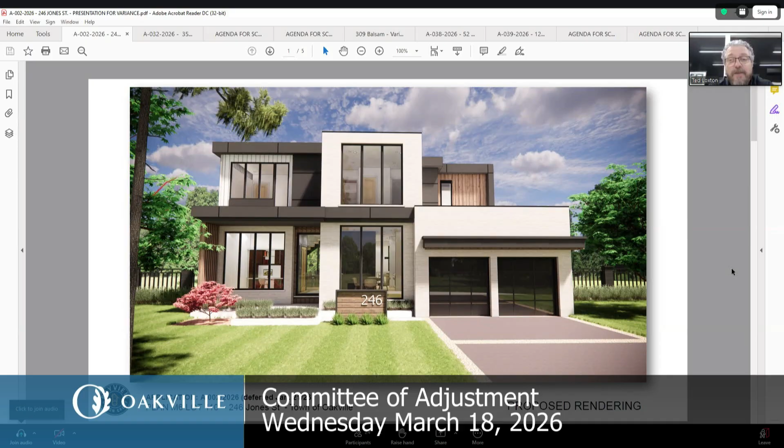However, massing wasn't the basis for staff's previous recommendation for refusal. Next slide please. Here we can see the original ask on the left and the revised on the right. The notable changes: first, banding now extends across the front face of the dwelling to separate what was basically a two-story window. Second, the one large garage door was separated into two smaller garage doors. These changes were done at the request of town staff, who are now in support of this proposal.

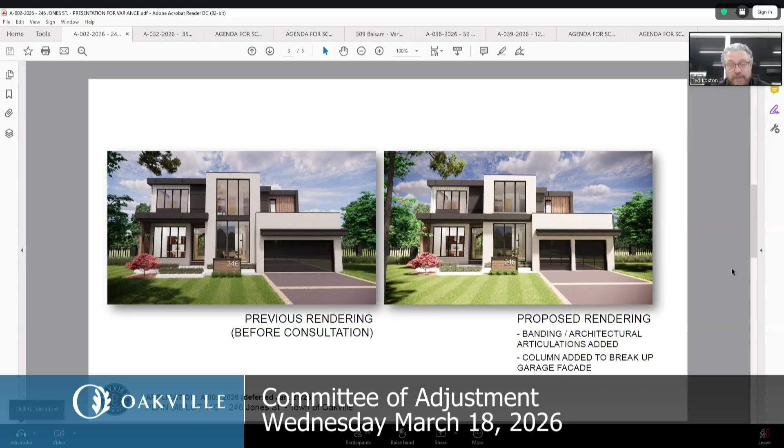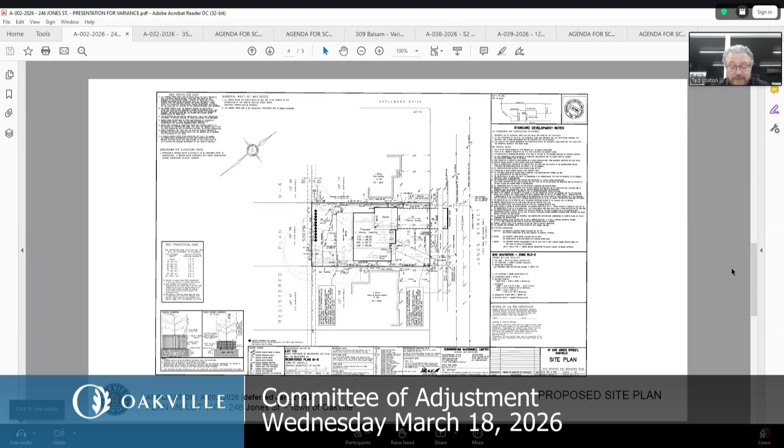Next slide please. The variance ask didn't change, as we'll see, with the exception of a typo I had. Next slide. Here are the site stats, with lot coverage at 39.8%, where 35% maximum is permitted, and the FSI to lot ratio at 43.55%, where 41% is permitted. For both, we tried keeping it as close to allowable as possible, so we do have some minor increases. Beyond that, I'd like to thank you for your time and consideration of our application, and I'm here to answer any questions.

Any questions of Mr. Loxton?

Has anyone called with interest for this application, Madam Secretary Treasurer? We've had no calls and no hands. Very well, then I'll take a motion.

Thank you, Madam Chair. Having undertaken my site visit, having reviewed the materials, including the written staff report, and having heard Mr. Loxton's presentation, I'm prepared to put forward a motion to approve the requested variances, finding that they conform to the 4 tests of the Act. The motion would be subject to the 2 standard conditions noted in the staff report: that the dwelling be constructed in general accordance with the submitted site plan dated February 4th, 2026, and elevation drawings dated February 5th, 2026, and that the approval will expire within 2 years of the date of the decision if a building permit has not been issued for the proposed construction.

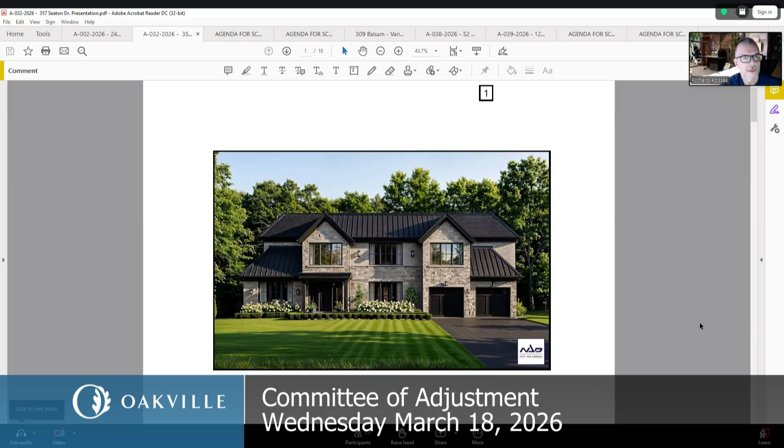Today we have two variances, there is a slide presentation as well. It's on screen, that's the infill two-story single-family home. The first variance is the garage floor area. If you go to slide 4, we can see the garage from plan view. The excess floor area for the garage is 62.28 square meters, where 45 square meters is the maximum. You can see it's a tandem garage, so the street facing is still 2 garage doors, and the excess garage space is in tandem with one of the bays.

The second variance is for lot coverage of 27.96%, where 25% is the max in our case. That includes the covered rear veranda, the covered front veranda, and the entire footprint of the home, including the garage. That concludes my presentation, if you have any questions I'm happy to answer them.

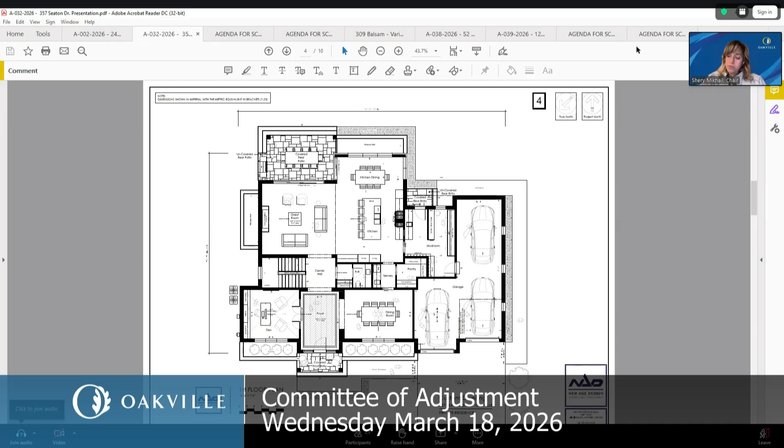Thank you, Mr. Kozak. Any questions of Mr. Kozak from the committee members at this time? I see none. Has anyone called with interest for this application, Madam Secretary Treasurer? We've had no calls and no hands. Very well, there's no interest from the public.

Who would like to move a motion? Go ahead, Ms. Price. Ms. Price, you're muted.

Taking into account my site visit, the reports from the agent and staff, and there being no letters of opposition, I believe the revised application to be minor in nature and in keeping with the general intent and purpose of the official plan and zoning bylaw, and desirable for the appropriate development of the land. The proposed development also maintains and protects the character of the existing neighborhood and does not present unacceptable adverse impacts. As mentioned by staff, the lower roof lines and step backs help break up the massing and scale of the proposed dwelling. The tandem parking configuration allows for additional indoor parking without adversely affecting the character of the neighborhood. In conclusion, I believe the 4 tests have been met, and I recommend the application be approved subject to the following conditions.

That the dwelling be constructed in general accordance with the submitted site plan dated February 2nd, 2026, and elevation drawings be submitted with the application. That the approval expires 2 years from the date of the decision if a building permit has not been issued for the proposed construction. Thank you, Ms. Price.

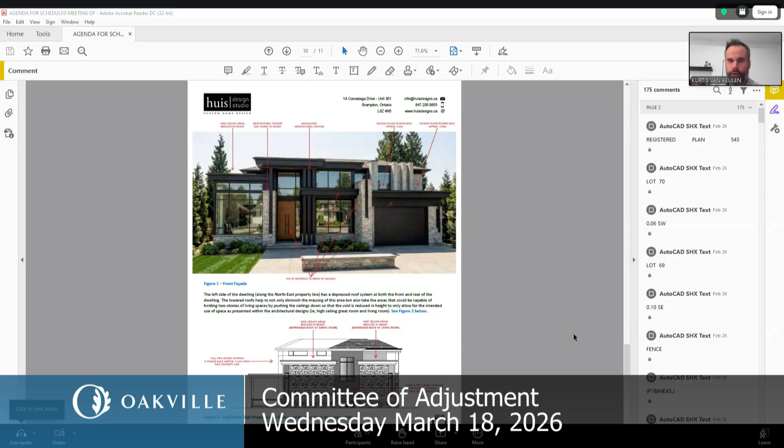Our attempt on the design was to set back the second floor of the dwelling. You'll see a large step back over top of the garage and over top of the entry feature, which has also been split up into two portions to accentuate more of a divide at the single story and break up the massing of the front entrance. Also, an attempt to reduce the massing was made for the living room off to the left-hand side of the front entrance feature. That living room ceiling has been reduced and pushed down, and the roof massing on top of the second floor has been cut in above that.

We believe these combined effects on the front facade really buffer the massing of the home to the neighboring properties. Slightly down on the same page, you can see a side elevation, which gives you an idea of the height of the roof over top of the family room. The family room at the back of the house has also been reduced to the same height.

There's another illustration on the second page that also shows the setbacks to the front elevation. So overall, the setting back of the second floor and the lowering of the 1.5 story ceilings really reduce the overall impact of the mass, thus allowing for the RFA increase.

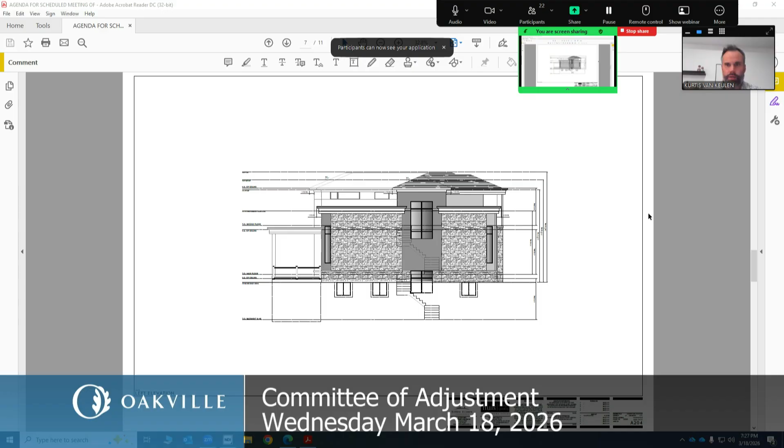Okay, Mr. Van Keulen, go ahead. Yeah, so if staff wants to bring up the proposed site plan, I can certainly answer those questions. It would be page 2 of the submitted documents. If you'd be able to zoom in just slightly, we would be able to show the garage. The proposed garage is slightly closer to 1402. However, it's within the setbacks of the zoning bylaw. So we are 1.2 meters on that side of the home from the property line, so 4 feet from the property line, whereas currently we're just slightly over 2 meters right now. So it's going from about 2.3 meters to 1.2 meters on that side, again within the legal zoning bylaw setback requirements.

There are 3 trees that look like they will need to be removed. One of them will be one of the larger ones. It's within the buildable footprint of both the zoning bylaw allowed buildable footprint as well as the buildable footprint that we're proposing. You can see that roughly on the right-hand side, just behind where the garage would be, or where the driveway would be, the larger tree there. We are making sure that the front tree in the front yard is to be retained and will remain. There's a very small tree in front of the existing home that will be removed, I think it's noted actually as a shrub when I look closer. So we are proposing a sort of circular driveway that will go around one of the large trees, so there will be a second entrance added to this property.

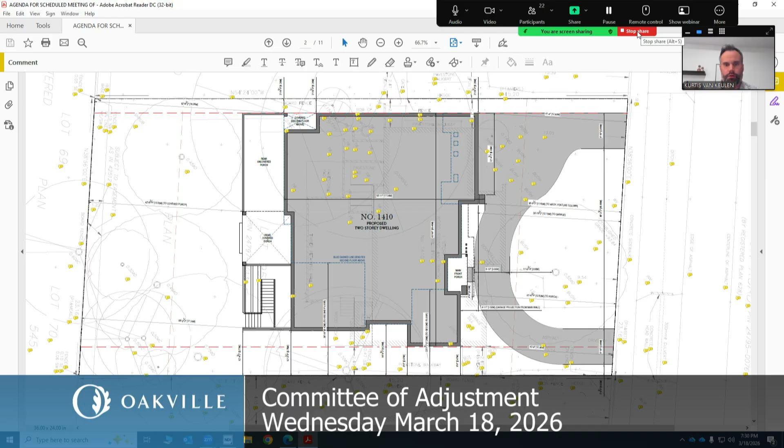So the trees and the setback, I believe that was the main question. Yeah, and the driveway is typical. I think that's probably why you designed it this way, so that you can save that tree. Correct, yes, making every attempt to save the large tree in the front. As many trees as we can save, we always try. Yes, okay, thank you, Mr. Van Keulen.

All right, anyone else had their hand raised or was interested to ask questions? I'm not showing any more hands. Thank you.

Okay, all right, we'll take a motion. Mr. Dickey, I'm gonna let Mr. Talowski take this one because we're gonna lose him on the next one because of his conflict. Go ahead, Mr. Talowski. Thank you for that consideration, Madam Chair.

Madam Chair, I'm pleased to move this application be approved as applied for, finding that it meets the test of the Planning Act. I believe the design of this house will mitigate any potential impacts that may have occurred. I would note that there was a neighbor with questions, which I believe the applicant has addressed. Madam Chair, I would make that approval subject to two conditions: that the dwelling be constructed in general accordance with the submitted site plan dated January 22nd, 2025, and the elevation drawings dated January 22nd, 2025, and that the approval expire within 2 years if the building permit has not been issued.

Thank you, Mr. Talowski. Is there any discussion on this recommendation? I see none. All those in support? Okay, the application has been approved, none opposed. Thank you, everyone, good evening. Have a good evening.

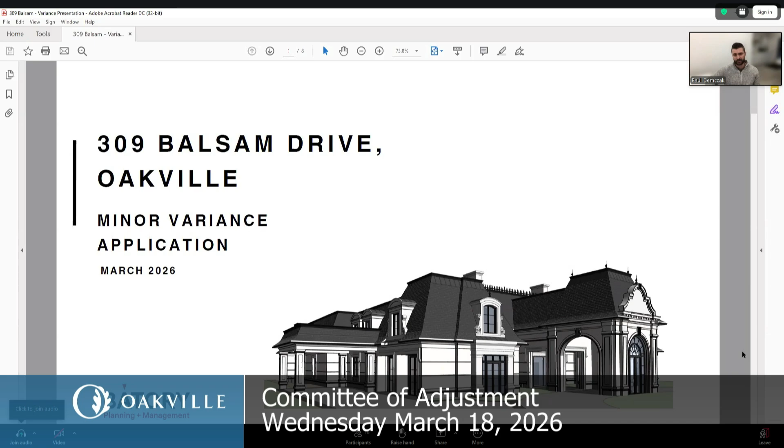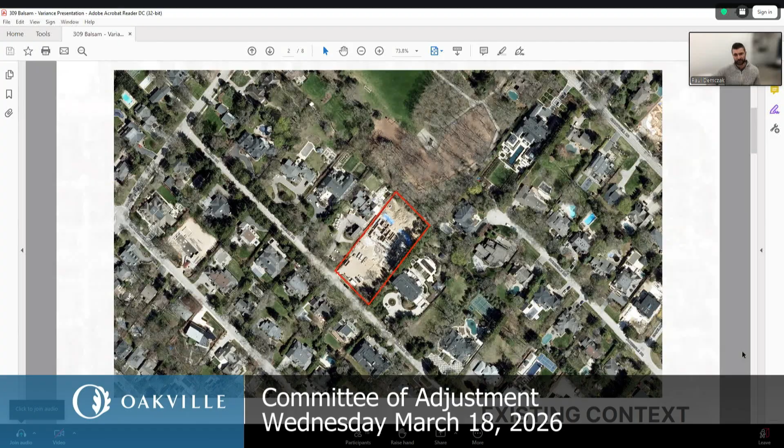So we could jump into it. My name is Paul Demczak with Vittori Planning and Management. I'm here on behalf of the applicant and owner for 309 Balsam Drive. If I could take you to the next slide. This is just obviously a current aerial photo. I'll just briefly note, for the benefit of the committee and the public, properties on the east side of Balsam Drive, as you can see just from the lot fabric, are significantly larger, obviously, than the properties on the west side of Balsam Drive. And there's a few nuances specific to this property in formulating some of the decision-making we had, and the location of the proposed porte cochere, which is being asked for this evening.

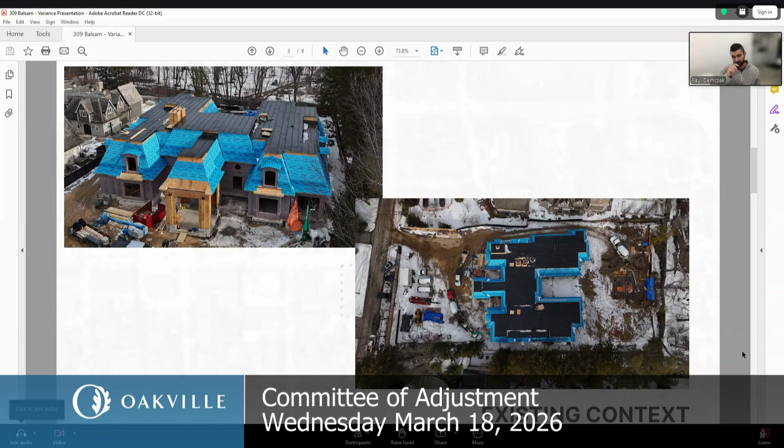If I could take you to the next slide, please. This is just actually current aerial and drone photographs that were taken just about a week ago from the subject property, and this is what it looks like in its current state. I'll note you can see the property, if you look at the image on the top left, you can see the adjacent house. It's a little unique in this instance, as there's a legal non-conforming condition in this case, and I'll bring it up briefly in another moment, but there's actually an existing detached garage that's in the front of that dwelling at 319 Balsam Drive, and you can see the dwelling at the rear of the property in that case. If I could take you to the next slide, please.

And so what's being asked for is no changes, obviously, in terms of what was previously approved to the existing dwelling. That's obviously currently under construction, and the footprint of that existing dwelling is shown here. For the benefit of the committee, that application was approved in July of 2023 at the time by the Ontario Land Tribunal. And at the time, there was a number of variances, and one of the variances I'll particularly call out is 3 garages that were approved as part of that OLT decision. You can see, I'll start maybe on the right-hand side of the screen, you can see the one single-car garage that's located on the bottom right of the dwelling, on the right-hand side of this image.

That garage door is the only one I would suggest that is visible from the streetscape perspective. Garage 2 is located on the left-hand side, the left wing of the entrance of the dwelling, and that's a side entrance garage. Then the third technical garage is actually the porte cochere, right at the front of the property where the circular drive is shown.

So what's before the committee this evening is what's highlighted in yellow, being an additional porte cochere or carport, as noted in the staff report, which is proposed for two variances: a reduction to the side yard setback, as well as the number of garages in this instance. I'll note this garage, if I could take you to the next slide.

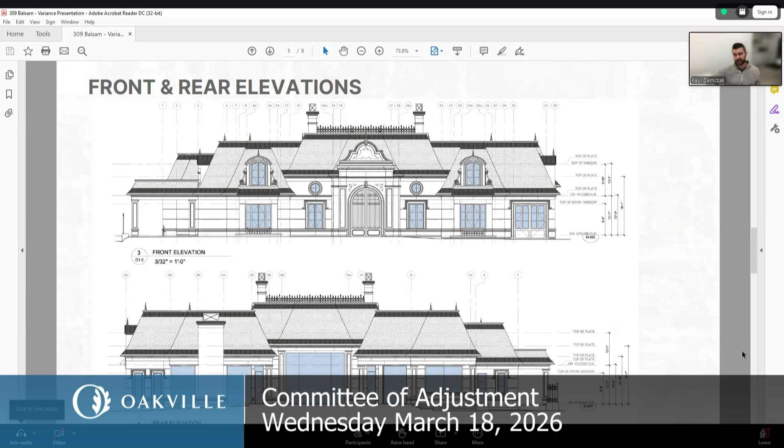It has 47 square meters in total area and a height of 5.21 meters, which is less than half of the total main height, or maximum height, of the dwelling. So it's intended to be minor in overall scale and not have any massive impacts, obviously not being entirely enclosed. If I could take you to the next slide.

Just as it relates to that garage, where it's located on the dwelling, it's actually roughly 8 meters behind the front-facing wall of the dwelling. It's located in a side yard condition where there's significant setback from the main dwelling to that side property line, in this case over 7 meters. So it's only the portion of the proposed carport that is seeking the reduction in the side yard setback, and where it's located interfaces with that existing two-story garage to the north, not the existing dwelling to the north. If I could take the next slide, please.

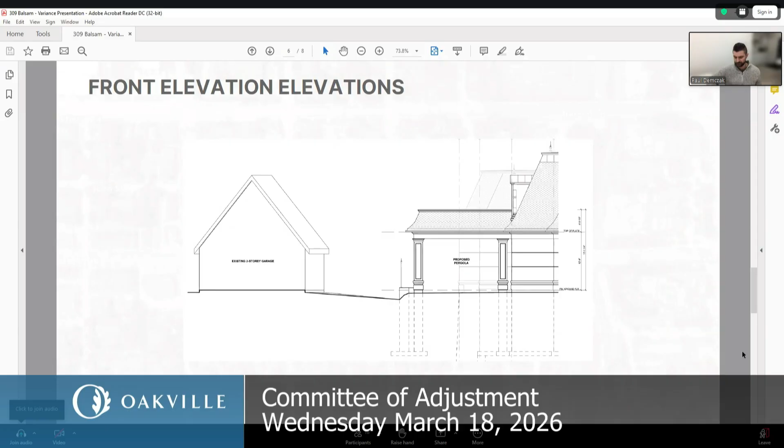I will also note there was a letter of support from that neighbor to the north at 319 Balsam Drive in support of the application. That summarizes my presentation, before the committee, should there be any questions. Thank you very much.

Any questions of Mr. Demczak at this time, or items of clarification? Mr. Dickey, go ahead.

Thank you, Madam Chair. I'm usually pretty fussy about setbacks, so that's my major concern.

I wouldn't say the fact that it's a fourth garage in a sense is the question here. You've got a zoning bylaw setback of 4.2 meters and you want to only have a lousy 1.5 meter setback. You've got a property frontage that's probably, the frontage is 47 meters, so it's way over 100 feet worth of width, but you're still infringing on the side yard setback.

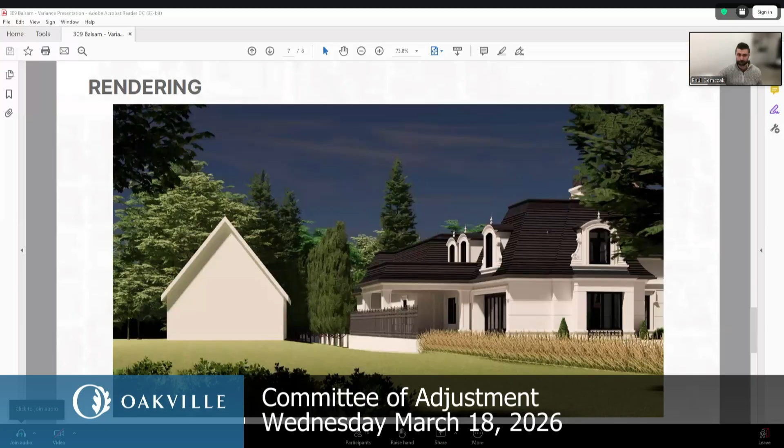So a few different components. The first one is the distance from Balsam Drive to that proposed carport is approximately 41 meters from the front yard, which is obviously a significant setback, number one. Number two, the distance from where that proposed carport is located to that front building wall is an additional 8 meters of a setback. And then further, this is the main comment I wanted to flag for the committee.

The unique condition of the neighboring property, which has that existing 2-story detached garage located in the front yard, is obviously a legal non-conforming condition. It's, I'd say, quite unique, both within the town context and specifically along Balsam Drive. When we looked at this application, the majority of the dwelling not only complies with the side yard setback, but on this side of the dwelling, where you have that garage condition, you have just over a 7-meter separation distance from the building to that north property line.

So this would, from my perspective, be an appropriate location to locate the potential carport and any side yard reduction to allocate for that. In many cases where you're seeking a reduction in side yard setbacks, it might be for a portion of the dwelling that has a massing or overlook impact. In this case, it's an open air structure with no enclosed walls on that portion. So I would suggest there would be no massing impact, and the committee should consider the uniqueness of that specific feature. I hope that helps partially answer the questions and concerns.

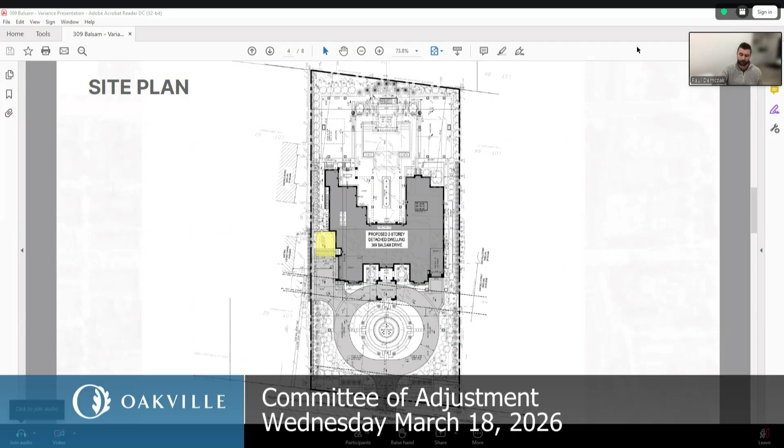Thank you, Mr. Demchik. Anything further, Mr. Dickey? Just, I'm not convinced. I'm not comfortable with this. Okay, thank you. Any other questions? Okay, I see none.

I do note there's one letter of support, but has anyone called with interest for this application, Madam Secretary Treasurer? We've had no calls and no hands showing. Okay, very well. So if there are no further comments and questions, who would like to move a motion?

Go ahead, Mr. Dickey. Thank you, Madam Chair. Based upon my review of the owner's application, the site plans and the building elevations, together with my site visit, it's my opinion that the 1.5 meter side yard setback does not maintain or protect the neighborhood character. I feel that the neighborhood has large lots with ample setback to allow separation between houses. In my opinion, this is not minor, appropriate, or desirable for this neighborhood. So I put forth a motion to deny the application.

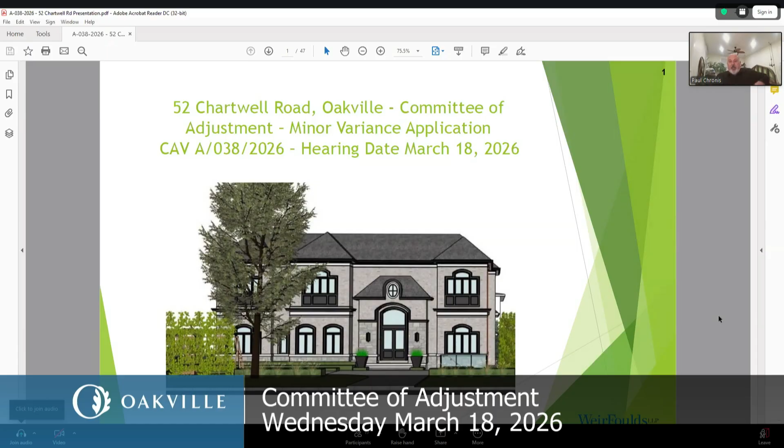So the property is at the northwest corner of Carson Lane and Chartwell. You may recall this property from 2023. The staff report summarizes that we had a consent application approved with a concurrent minor variance to recognize Chartwell Road as a frontage for purposes of the bylaw. That application was abandoned, and we did not pursue creating two lots.

The client had a change in plans. As ARUs were coming forward, rather than have 6 ARUs on 2 lots, he decided to have 2 ARUs plus the principal dwelling on the single lot, to provide a more contemporary built form, footage, and size of units.

If you go to the next page, what you see here in faint green is the outline of the existing building. Substantially, that's going to be maintained. There's an addition shown in crosshatch in the front and one on the north side. The setbacks, gross floor area, coverage, and all those matters fully comply with zoning.

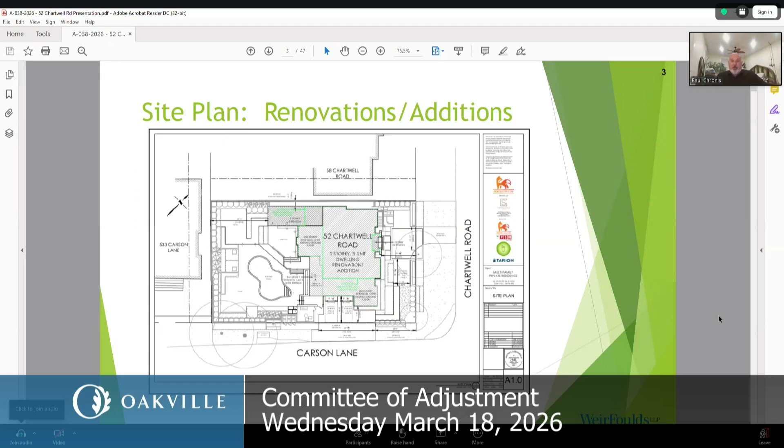Here I've just provided the summary, but you've seen the plans already. It shows compliance with all aspects except 4 areas, and it shows the unit size composition: Unit 1 being roughly 3,000 square feet, Unit 2 being roughly 2,800, and Unit 3 being roughly 2,000 square feet. So they're substantial size units, contemporary in nature, and provide all the amenities required for ARUs.

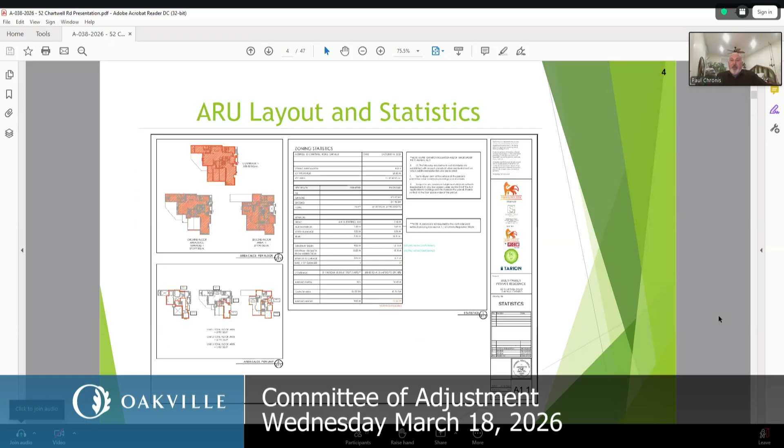And by the way, they are separately serviced. As you heard at the last meeting, that's a requirement.

So these are the variances. The first, marked with the green arrow, is for the private garages. Right now there's one garage, but because we need to provide separately allocated spaces for the units, we are dividing, partitioning the internal space of the garage. There'll be no changes on the outside other than it will continue to have 2 garage doors, so someone from the street won't be able to tell it's a 2-car garage. This is required partly because of electric vehicles — they'll have charging stations, and those can sometimes cause risks, so you want to fully enclose these spaces, since a lot of people nowadays have electric vehicles and will be provided with tier 2 charging systems.

The second variance is driveway width. The second and third variances, which I marked in red, are existing situations — there's a driveway off Chartwell that's existing, and a driveway off Carson Lane that's existing. The way the bylaw measures this is a combination of both, and that combination drives the variance up to 28.1 meters versus the required 9 meters. These are existing situations that predate the new bylaw coming into effect.

Same thing with variance number 3, which is a setback from the intersection of Carson Lane and Chartwell. Again, that's an existing condition that's been there for years with no issues — these are minor streets with speed limits around 40 kilometers. There's been no conflicts for years; I don't know of any incidents.

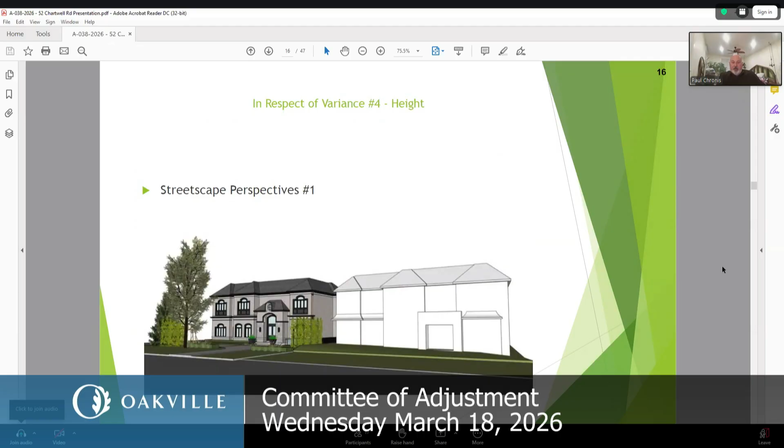If you jump forward to pages 16, 17, and 18 — I've taken one at an oblique angle, one facing forward. You can see the roofline and the treatment of the facade matches the property to the north. So as one progresses down Chartwell, there is no visual intrusion of the building and no visual impact on the height. It matches the exact same height as the property to the north, which was approved by minor variance by the Committee of Adjustment some years ago.

And then the other one is looking from the north at a slightly different angle.

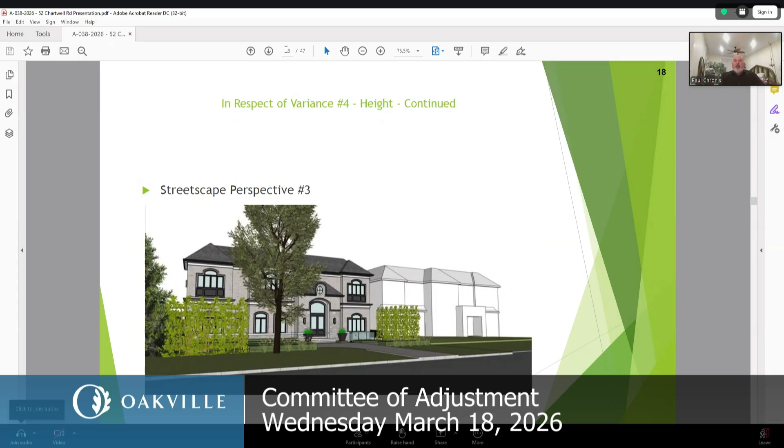If you back up to slide 15, what I've included there is, we've had multiple pre-consultation meetings with staff, Mr. Brandon Hassan and Kay Coburn, 3 or 4 of them, I believe. And we've collectively come to a proposal that meets the housing intensification purpose of the province.

I have in the slides provided the zoning and the official plan, which is low density residential, the RL3-0 zoning. I can also get into Ontario Regulation 299-19, which you heard of extensively on the ARUs, and also the other regulation enacted almost a year later, that provides for a 10% reduction in the setbacks, which staff have reported in their memorandum. I just want to make one correction on 299-19, the ARU.

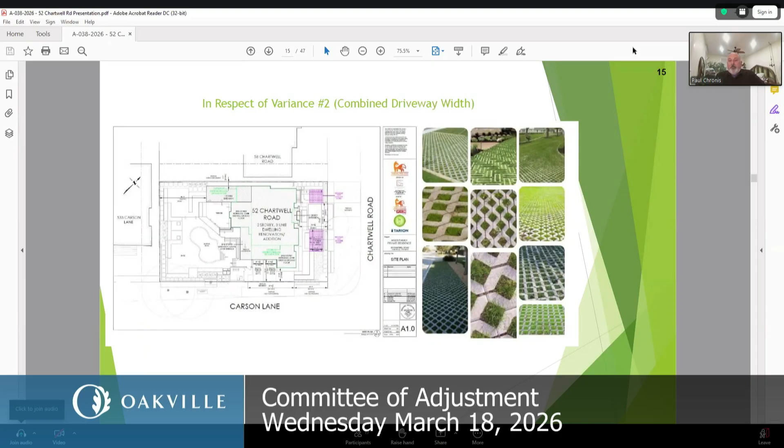Thank you. Thank you, Mr. Chronis. Any questions or items of clarification of Mr. Chronis at this time? I can't see anything, just give me a second, I have to go back into grid view. Thank you, go ahead, Mr. Hardcastle.

Thank you, Madam Chair. Good evening, Mr. Chronis. Good evening, Mr. Hardcastle. And thank you for your presentation. I was looking for a little bit more detail around the building height piece.

I'll be frank right up front, I have some significant reservations about the building height piece, and I'm trying to understand in a little bit more detail about the why. I basically have a rationale from staff that says because the guys next door have it. No, I'm looking for a little bit more to understand. It's a pretty significant increase, and we're talking about a fairly substantial building with additional GFA on it, tacking on another 1.4 meters onto that. It's pretty significant, and it's gonna change things a fair bit. So I'm looking for a little bit of understanding there, sir.

Yes, okay. So it's to actually provide for a roof height to accommodate construction and a little bit more usable interior space. We also looked at it from the perspective of, as you're coming down Chartwell, does the height have a visual intrusion on the existing streetscape? And from the perspectives we showed, we didn't feel that it does. The articulation in the facade in front contributes to a uniform landscape. So as you're approaching going southward, to have a height deviation at a corner lot, which has more prominence than an interior lot, looked a little bit awkward. So not because the neighbor to the north has it, not because we wanted to match it, but because of functionality and construction of putting together the new roof structure, that extra height accommodates that.

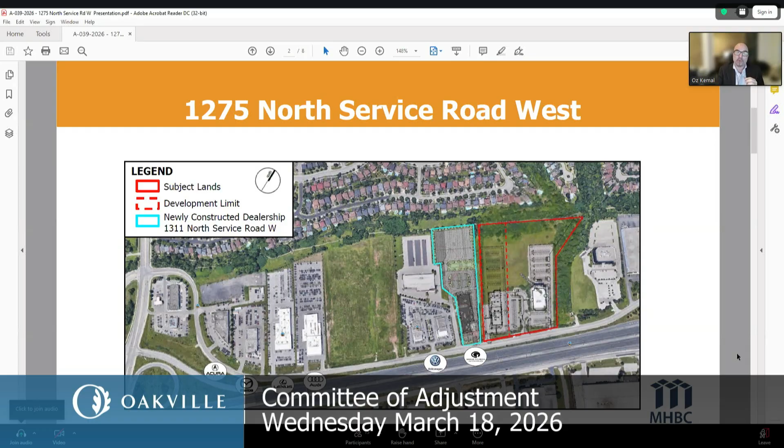So what happens now is instead of having the buffer of 3 meters to 17.5 meters, you now have the buffer of 17.5 meters to 14 meters, and it creates a very narrow pinch point by which you can locate your building. So we're requesting this variance because everything has to be outside of the 14-meter setback that's required.

We wanted to make sure that we were able to maintain a 6-meter fire route, and then we wanted to make sure that we were able to maintain accessible parking spaces along the front door, which is facing North Service Road. So those items requiring us to have the drive aisle, plus the accessible parking, plus the enhanced walkway in the front of the building necessitated the variance to go from 17.5 meters to 32 meters.

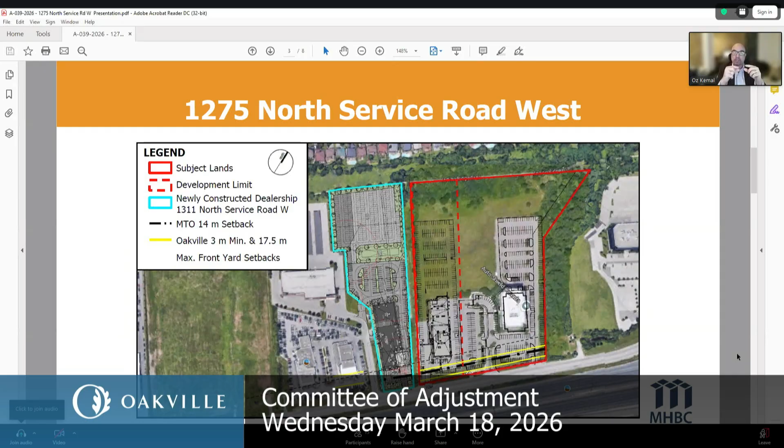Again, this is similar to a minor variance application that the Grand Touring Automobile dealership, shown in blue there, also needed because of that pinch point created by the MTO setback.

Next slide, please. So this is just a site plan showing the existing, and if you're driving along the 403 heading east towards Oakville from Burlington, you'll notice that there used to be, I think it used to say Travelers across the top—it was an 8-story office building. That's shown on the north of the page, and then we would be at the south of the page there with the new dealership.

All other provisions of the bylaw are being met, and we're at the tail end of the site plan approval. We've got our clearance from the Conservation Authority. MTO has given us our clearance as well because they like that we've moved all of the requirements outside of their 14-meter setback. This variance is just a necessity to close out the site plan approval. Staff are supportive of the application subject to the conditions which we're agreeing to. I'm happy to answer any questions.

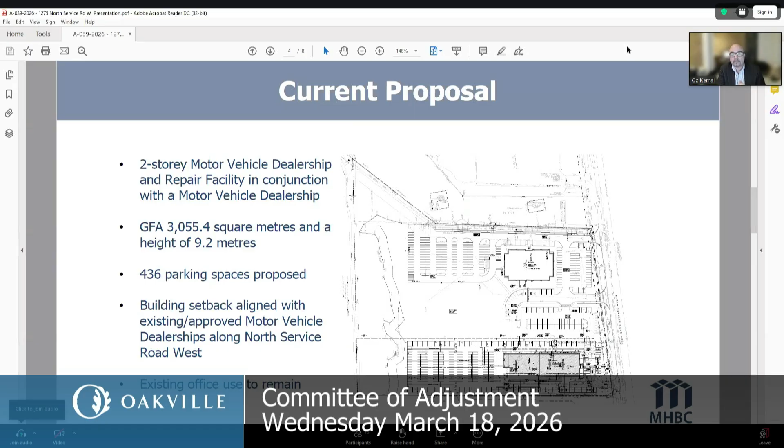Thank you, Mr. Kemal. Any questions or items of clarification? I see none. Has anyone called with any interest in this application, Madam Secretary Treasurer? We've had no calls and no hands showing. Very well, then I'll take a motion.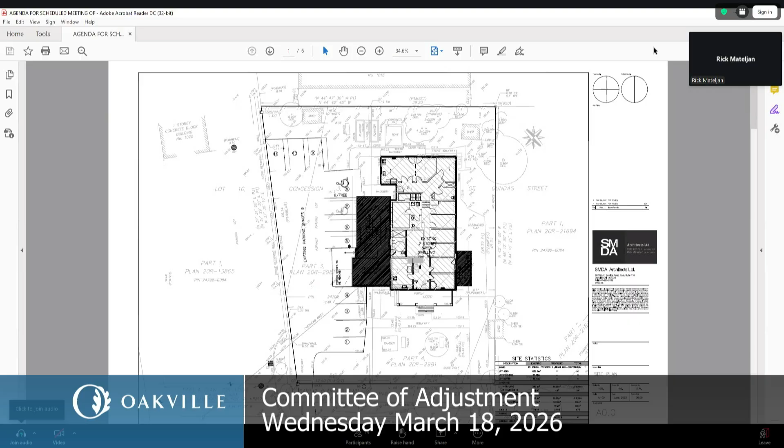And as I began to mention before, our planner, Ms. Friday, is here, and she can answer any planning-related questions. So I'd be happy to turn it over now to her or to the committee for their questions. Thank you. Any questions of the architect or the planner at this point?

Okay, I see none. Has anyone called with interest for this application, Madam Secretary Treasurer? We've had no calls and no hands. Okay, very well. Who would like to move a motion?

Go ahead, Mr. Talowski. Thank you, Madam Chair. Madam Chair, I move that this application be approved as applied for. While larger, I find it to be similar in nature to the existing use. I would make that approval subject to two conditions: that the addition be constructed in general accordance with the submitted site plan and elevation drawings dated November 5th, 2025, and that the approval expires within 2 years of decision if a building permit has not been issued. I would also note that there was no opposition from the community in this matter.

Okay, is there a discussion on this recommendation? I see none. All those in support? Okay, the application has been approved, none opposed. Thank you very much.